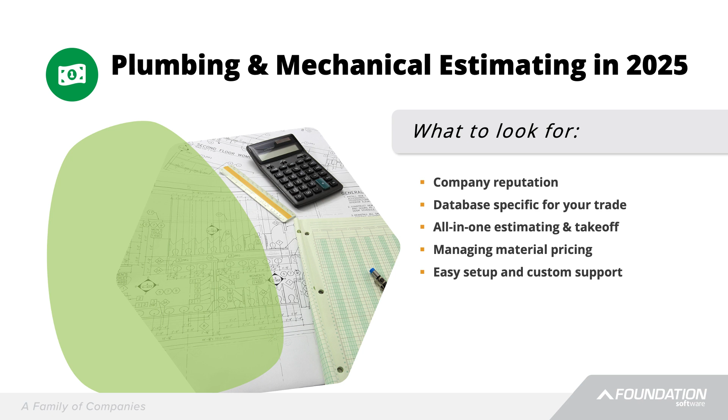A couple things to keep an eye out for when you're looking for estimating software. You want it to be long-term, that's really what we are. So you want to keep an eye on the company reputation, make sure the database is set up for you guys, a few things like that. I'll point out some stuff going through the demo as well, or through the webinar.

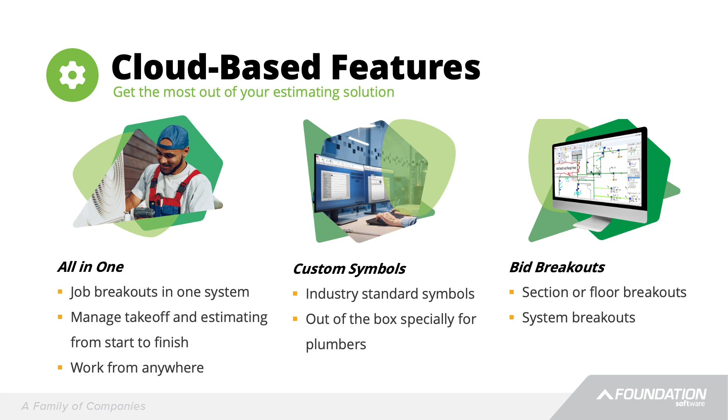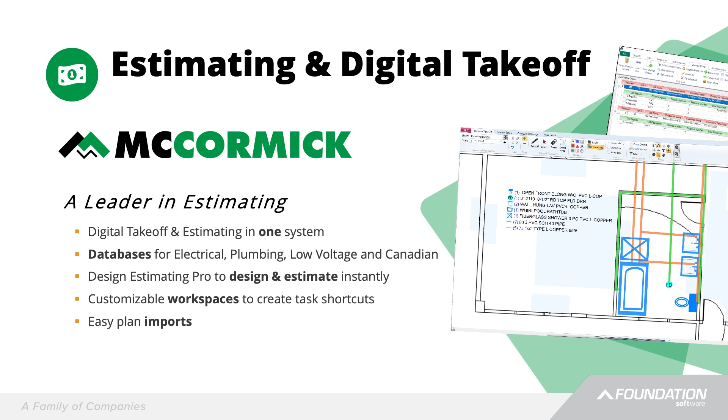A couple other things is how easy is it to access? Do you have to have your computer with you, or not? Ours is 100% cloud-based. You can put it on your own equipment if you want to, but most guys go with the cloud because you can access it from wherever you want. We've also got digital takeoff, that's a huge part of it. Nobody wants to print out drawings anymore. Puts everything in one spot. You can do design builds, you can doctor up the drawings, make it look however you need before you send it to your guys in the field. So let's jump in the system and show you guys how this thing works.

Now I've got this system actually open. We do have two levels of product, McCormick and McCormick Pro. I'm going through McCormick Pro, it's got a little bit more advanced features, really going to help you guys dial in. And the nice thing is you can start with the base and the program will grow with you.

So I'm logged in here as my admin. Everything we do is based on username and password. Going through this, you're going to see a lot of who the username is, like what I've got over here on my right. You're going to see that later on doing takeoff and everything as well.

Jumping into the system a little bit more, when you first log in, this is your landing page. Call it a home page, call it whatever you want. But what it does is give you a good place to start. It's got your most recent jobs over here on the left, some bids that are coming up so it's going to help you track those, and your change order tracking down at the bottom. A couple of our guys will also like this message board here, it allows you to shoot messages back and forth. So if you got a PM or something that needs to check something out, easily just hit it right there, throw it to them, and you're set.

So this right here is a really cool page. If you want to get more into organization of it, all you simply do is close this down, and then you're back looking at a total job screen. What we're looking at here is it's going to show you your job names, bid status, dates, times, prices, sell price, everything like that for you.

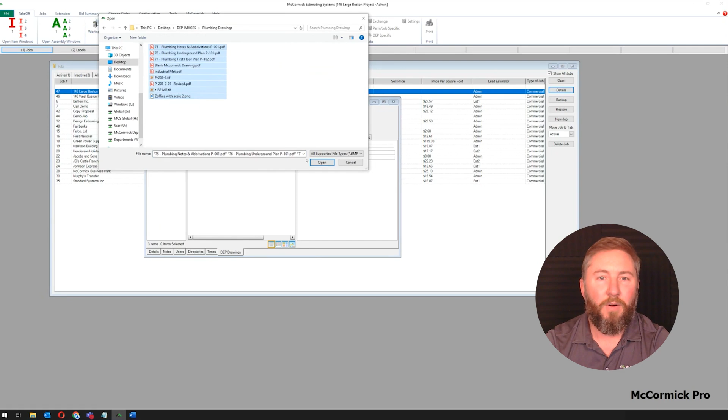Come on up here, simply grab the drawings from wherever they are on your computer and hit open. So really not picky on the format. Really any flat file is fine. So PDF, TIFF, JPEG, PNG, not a big deal.

Now, the cool thing is if you get a big PDF that's got 20, 30, 40, 200 drawings in it, that's all right. It's going to break it out just like this for you guys. So you can actually come through here and pick what drawings you want. You just simply check the box, hit import, and those are the two I'd bring in. But I've only got 10, so I'm just going to hit import all. Simply hit OK, and there we go.

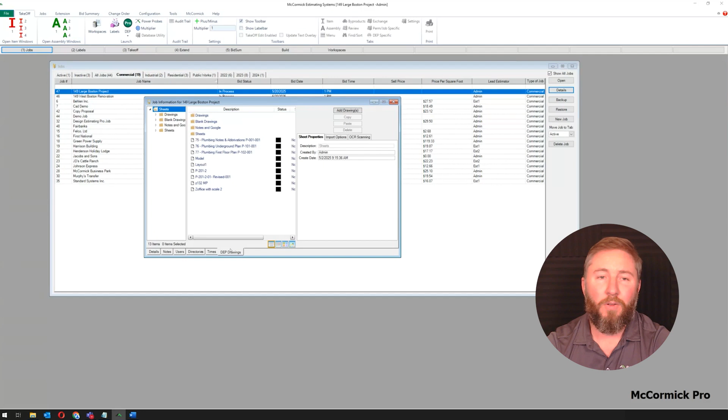So that's really all it takes to make a new job, make a project here in McCormick. Throw your details in, any notes if you have them, load the drawings up. When you're done with that, close this down, and in all reality, you guys just made your first job right there.

All right, so now that we have that job made, we just made that 149 Large Boston. I'm going to come over here and, again, simply just open it up. So all we're going to do to break out your entire bid process, we take it down into 5 steps, which are right here at the top. You got jobs, labels, takeoff, extend, and bid summary. Really the same 5 steps every single time you do a job.

So first step, jobs, that's already done. You guys finished it. You made the job, loaded the drawings, you're through that entire step. You're already on to step 2. All you do is hit the button, opens up your labels for you. Now, the cool thing is, there's not really a right or wrong way of doing your labels. All we're doing in here is breaking out the job because we're going to assign parts and pieces to these areas. Kind of a rule of thumb, I start big, work small. So I've got my bid packages, buildings, floors.

You could do systems, you could do sheets, really whatever you want. But as I mentioned on step 3, we're going to assign the parts and pieces to these areas. That way, on step 4, we can actually get a report letting us know what's going to happen on, say, building A underground. I'll show you that here in a second, but that's really all we do for labels.

So we're done with that, close it down, and hit step 3. All right, so takeoff—once you hit the button, you get a couple windows that pop up. I'm going to explain what's going on the screen before we even start doing any takeoff.

Right here at the top I have some drop downs. I've got my base bid, I've got building B, and if I hit the drop down it lets you switch between them. These are the exact same as what we were doing on step 2. So I mentioned that we're going to assign parts and pieces to these areas—that's what's going on in my audit trail.

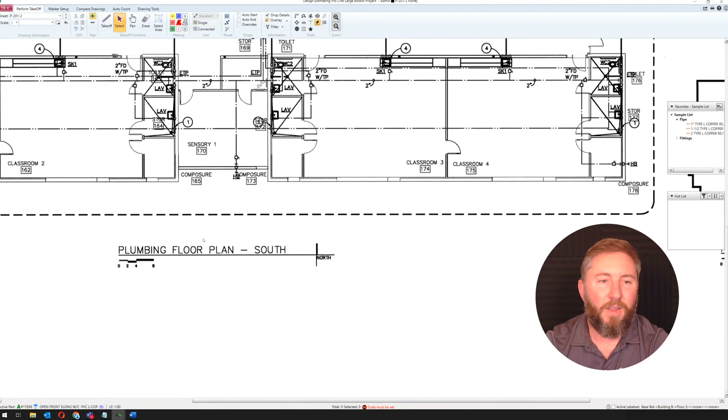Now the next thing, as you all know, you've got to make sure your scale is accurate before you start measuring anything out. This drawing doesn't even tell me what the scale is. So all I do is go back up to the top left, set it from a known point, and line these little green dots up. There we go, that's close enough just to show you guys how it works.

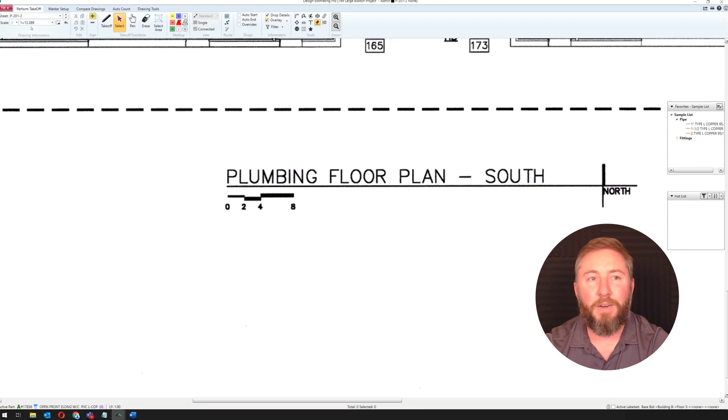And you just simply type in the footage. So I know that's 8 feet. Hit enter. All right, so my custom scale is 1 = 13.389. So now anything I do on here is going to be set for me. I don't have to worry about scale, zooming in, zooming out, and moving around this thing, super easy.

You just use the wheel on your mouse to zoom in, zoom out. It's a button, so click it if you want to go that way. Now, to start doing takeoff, again, we're going to use the items and assemblies, but you still got to get access to them. This system works really well if you've got 2 monitors. Running one's not a big deal, but if I try and share 2, it gets kind of weird.

So I'm going to minimize this and simply come through here and grab that cast iron. I'm going to grab no hangers because it's going underground. Pull this back up, and now all I simply do is click here to start. And that green line, that's my cast iron going in. So you just simply click to start, click to end.

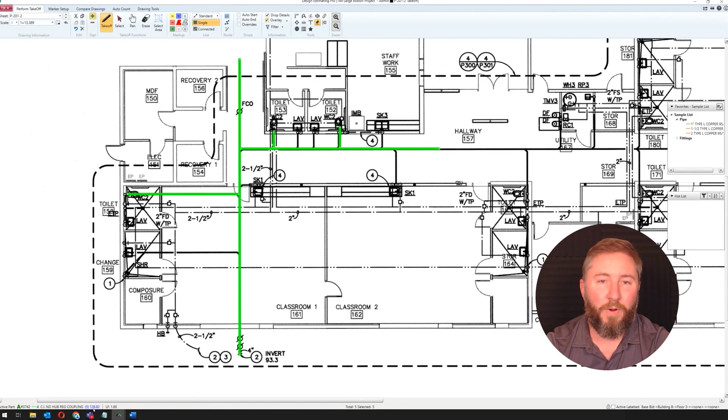So let me catch my water closets real quick. There we go. All right, so down here in the bottom left, it's actually going to tell you, you just did 4-inch cast, 5 runs, looking at about 128 feet. Now again, those are assemblies, so it's got everything I need from point A to point B.

I'm good, I'm set. Now when I grab my 2-inch cast iron, you guys can see right there in the audit trail, it's actually already accounted for, it's taken off, it's done. So when I throw my 2-inch cast iron on here, it's going to count for all that too. There we go. So really, looking at it, all my waste is taken care of. I don't have to worry about anything.

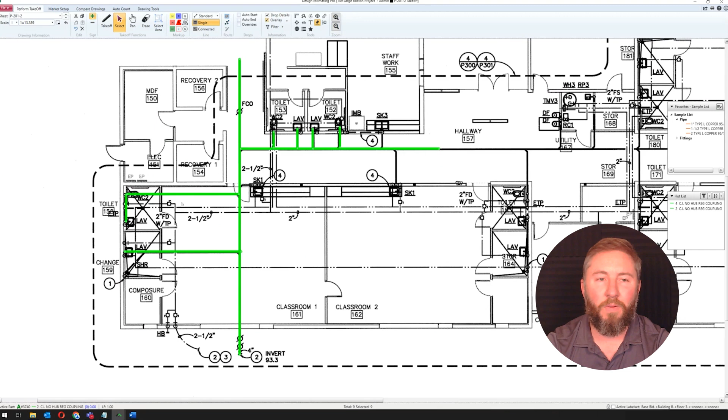Now, a couple big things we can do on here, especially with the drawings—a lot of people are getting now, they're not really up to par. They're missing some things, things aren't labeled, everything like that. Personally, I like actually double clicking these lines and changing one little setting. So I put a CI4, and I'm going to do the same thing here on my 2-inch pipe.

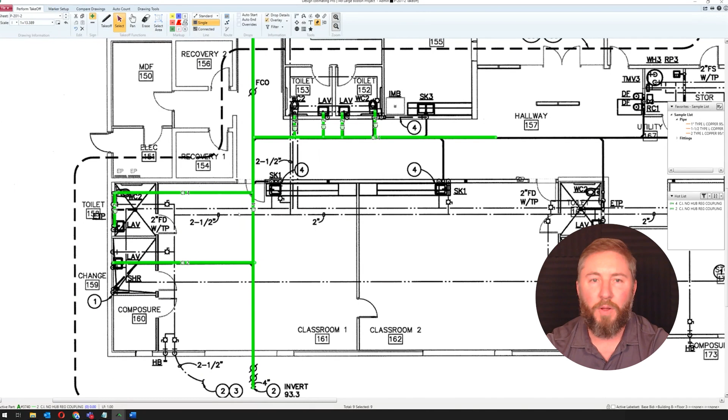There we go. All right, so the reason for doing that is it actually labels all my pipe runs for me. So now when you send this out to your guy in the field, they don't just see, hey cool, you took off a green line. They can actually see that you ran 2-inch to your lavs instead of 3-inch, and they know exactly what you did and how you ran it. So that's really all it takes to do pipe. I mean, if I do copper, it's going to be the same thing—you just simply click to start, click to end, and move on.

So I'm going to grab some fixtures real quick so you guys have those dropped on as well. I'm going to go back to that water closet, but I'm going to do cast iron instead of PVC. Snag my open front, and simply drop these on. Now, as you guys can tell, it actually looks like a water closet.

Kind of mentioned it before, if you guys are doing any sort of design builds, as-builds, or you just want the symbols to look nice and pretty, you can make that happen. That way, again, less questions from the guys in the field, or if you need to get approval from somebody, you have what it looks like. So I'm going to throw those lavs on real quick as I'm talking.

But in all reality, that's all it takes. In a couple minutes, we just measured out our waste and took off pretty much 3 complete bathrooms. And if I throw that shower on there, that 4th one would be done as well.

Now, a couple tricks that we could do in here, because that's still kind of manual. You're still clicking through everything, going to the database to find everything. We do have this favorites list over here on the right, so I can throw it right over here for you. So if I was going to do that copper, all I'd simply do is grab like my copper 2-inch, and now just simply start measuring stuff out. So as you can tell, everything's color coded for us, but now my copper is done.

I also have what's called our hot list. As soon as you do takeoff, it's going to show up in the hot list. So I've got my cast iron in there, I've got my fixtures in there. So if I want more 4-inch cast, I just simply click on that and measure this out, grab my 2-inch and go north. Real quick and easy, just simply build up a bathroom.

So again, as I'm doing all of this right here, this is all going to audit trail. It's being counted for, so everything's in the assemblies. It's got everything you need - everything has pricing, everything has labor. So at that point, you're basically set with your takeoff.

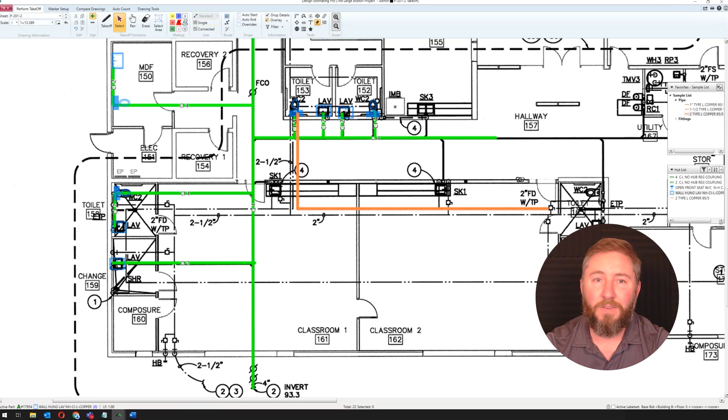So from here, there's a bunch of other cool tools, things like that. I can come up to the top, I could throw notes on here, you could throw call outs, you could do compare drawings. Actually, let me show that to you real quick. I'm going to hit compare drawings, I'm going to check these 2 boxes. And what that does is it gets rid of the background and kind of changes the color of the lines for us.

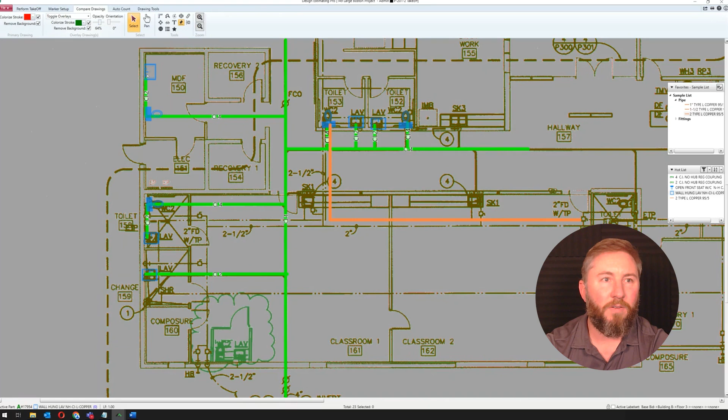So now when I bring a brand new drawing on, like my revised one right here, it's going to actually be a different color. Reason for that is now I can actually take this and make it disappear. But if I slowly bring it up, we can see that all these lines up in here, these all line up, so I'm not too worried about that.

But right down here, looks like they added a bathroom. They didn't run any pipe to it yet, so I still got to do a little bit of design work. But now I can see exactly what was changed. So that way, there's no chance of you possibly missing something on a change order or revision. Makes it real simple to track that stuff down.

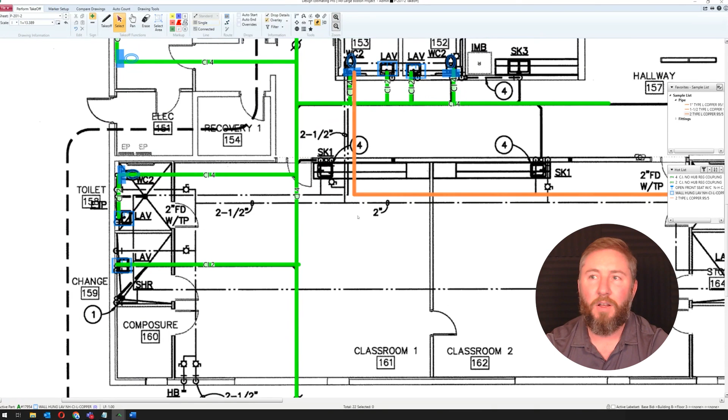So from here, hypothetically saying we got everything counted, measured, set, all I do is come up here, close this down, and that pushes us on to step 4. All right, so hit that step 4 extension, that's where this opens up. Now let me make this full screen for you real quick.

This is going to show me a complete list of everything we took off on the job. Like right here, you got your 4-inch cast, looking about 2,600 feet. There's your price per foot, so your total cost to go grab your 4-inch cast is going to be about 27,500 roughly. Your 0.11 man hours per foot, so you're going to be moving 4-inch cast for about 280 hours. So every single part, every single piece has that information for us.

I mean, we've even got consumables in here. So if you say, hey, how much solder am I going to need, or how much time am I going to be soldering my 2-inch pipe?

Well, I can tell you right there, you're going to be doing it for about 8 hours. So everything in here has got that information for us. Now, up here in the top right, you've got your total cost to go buy your material, which is $282,000. And it looks like this job's going to take you just shy of 3,300 hours.

Now, this is good. This is great. You're going to get one big total number. That way you can send this out and kind of get some information from there.

This little extension here can do a lot more for you guys, though. If I come up here and hit my drop down, I've got all these different reports and everything that I can go between. I can even go to an item pull sheet, and when I hit that, it pulls up literally just an item and material list with the name.

You can click in here if you need a certain manufacturer, or want to put a note before you send this to your supplier. And getting it to your suppliers is very simple. You just simply file, export, throw it to Excel, throw it in an email, get it off to them. So it makes it real easy to get your stuff ordered or get a price or a quote on specific material if you need it. So I'm going to bump back up to that pricing one.

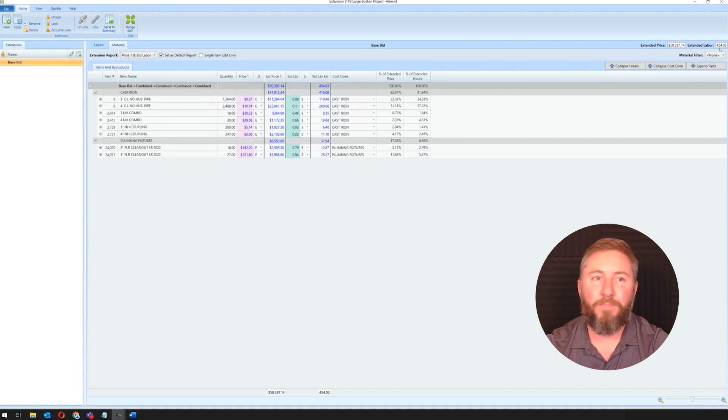So I'll tell you that your underground is going to take you about 455 hours out of that total we were looking at before. I can also come back here, hit my labels again, recheck these, and I can even get more detail for you by separating these out.

So now I'm looking at my entire job again because everything's checked besides my alternates. When I go back to my material tab, it's going to show me the 3,300 hours worth of material, but it's going to break it down. So right here's my underground, showing that breakout in my material, and then it goes down to my floor 1.

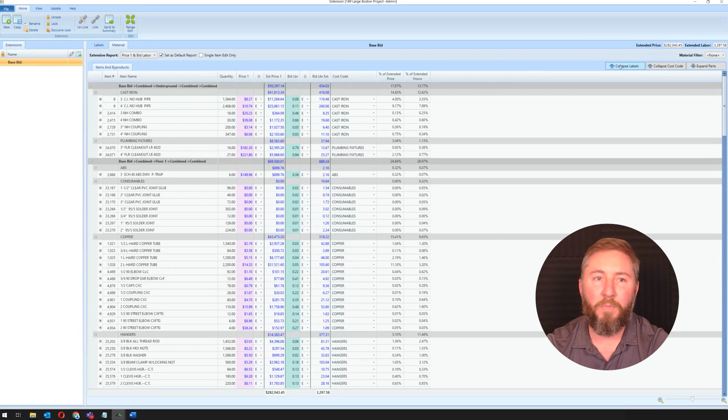A lot of our clients will actually take this, collapse it down by hitting this one button, and now you can send this out to, say, a PM or a GC or anything. If they're asking you for deadlines, instead of telling them, hey, a job's going to be 3,300 hours, here's the deadlines along the way so they know what's happening and what they should expect from you guys. Really helps it out, really makes it nice and simple.

Tons more detail I can get into on this thing by breaking down by cost codes or customizing the reports, everything like that. But again, I want to kind of keep it short. So I'm going to come up here and hit send to summary.

It's going to pop up a message. I'm just going to simply hit OK. There we go. All right, so hit OK on this and simply close this down. So now from there, that was our entire step 4.